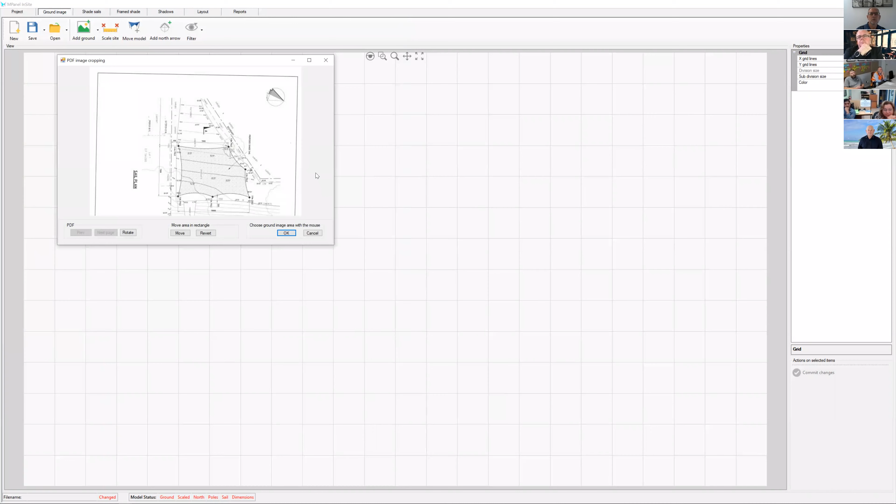Now, what we're presented with is a tool to actually import the background. And this is actually from one of our customers in Australia. So the first thing we do is rotate this to the correct orientation. Having done that, I'm just going to select this symbol here, which is the direction of north, and drag it to a place in the drawing that I'm going to be working.

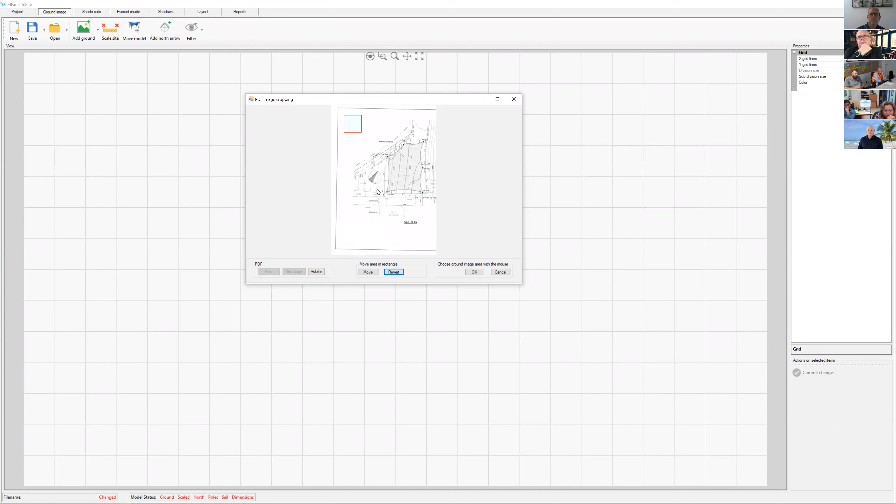Now, this could obviously be a scale as well. A lot of PDF drawings come with a scale, and we could drag that scale into the working space. Now I'm going to select the area of the drawing that I want to import and select OK.

So here is a typical PDF file that we've received. The first thing we have to do is scale the site. Now, I've actually got here in the drawing a dimension to use. I select the 2 points and enter the dimension. Now, this drawing is now scaled correctly in 3D. Everything we do now is correctly scaled.

So an important thing that we need to know from any site is we need at least one measurement. And that might be, for example, if we haven't visited the site, we can look at a road or a car park structure, we can scale a drawing by picking up some detail from a photograph.

The next thing we have to do is add a north arrow. Now, north here we can see is, we change the angle of north to 25 degrees. And you may not see some of the details here in the properties.

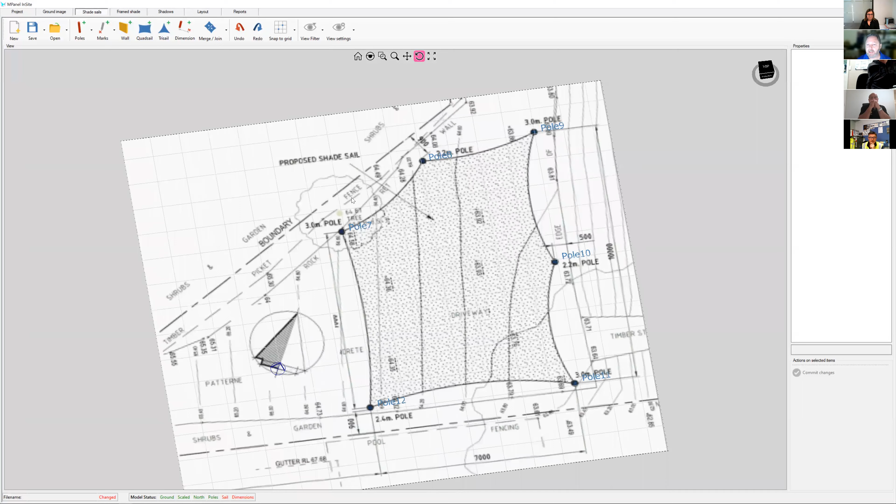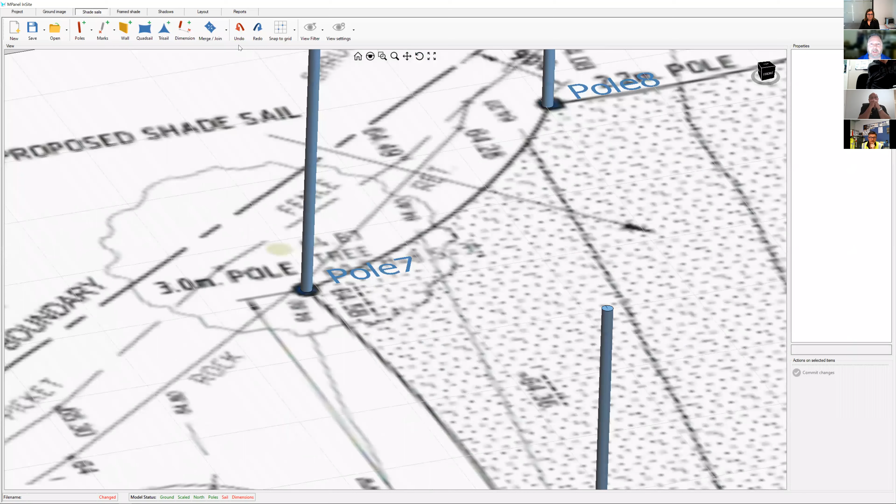Now what's happened is we've added 6 poles that are all the same height. And according to the design here, we need to make some of these poles lower in height. So I'm going to hold down the shift key and select the 3 low poles and change the heights, all of those at the same time.

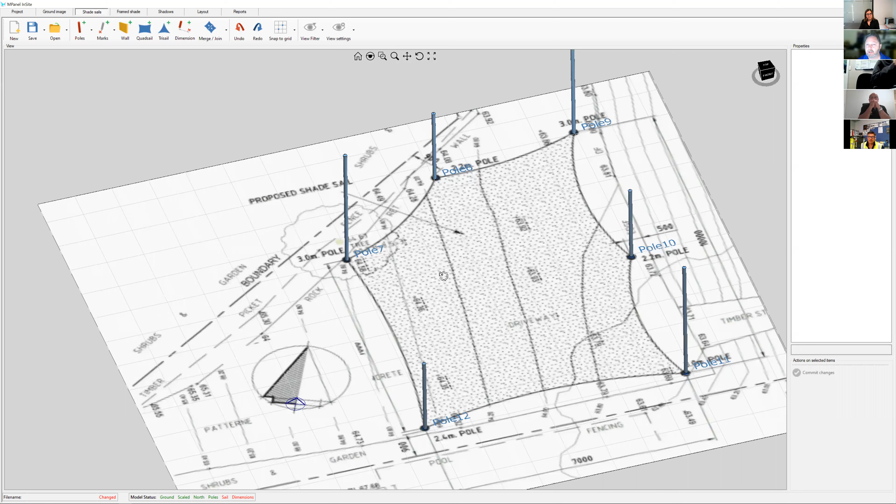The next stage is to add a sail. We start, I use top left, but it just needs to be clockwise. It's not important. There's our first sail. Add another sail.

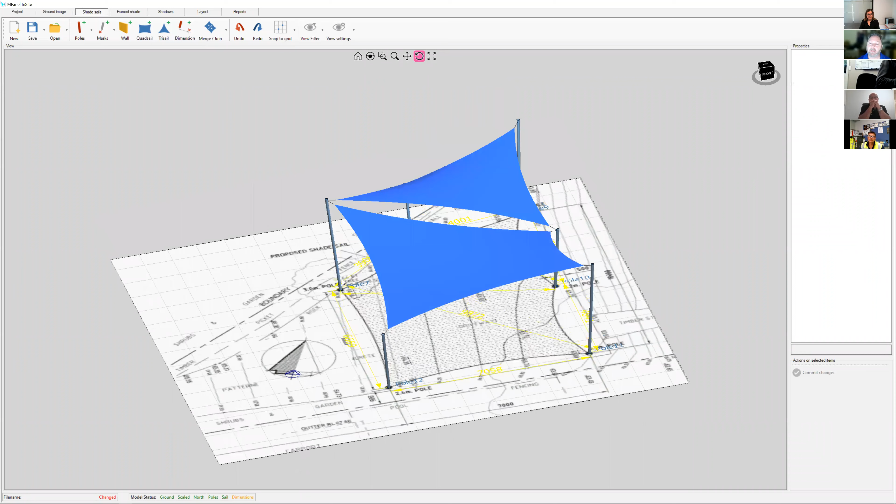Now, what you may not have noticed when I added that second sail, I'll just go to top view. I'll just undo adding the second sail. Now notice the angle of these 2 poles. As I select the last pole, watch the angle of this pole.

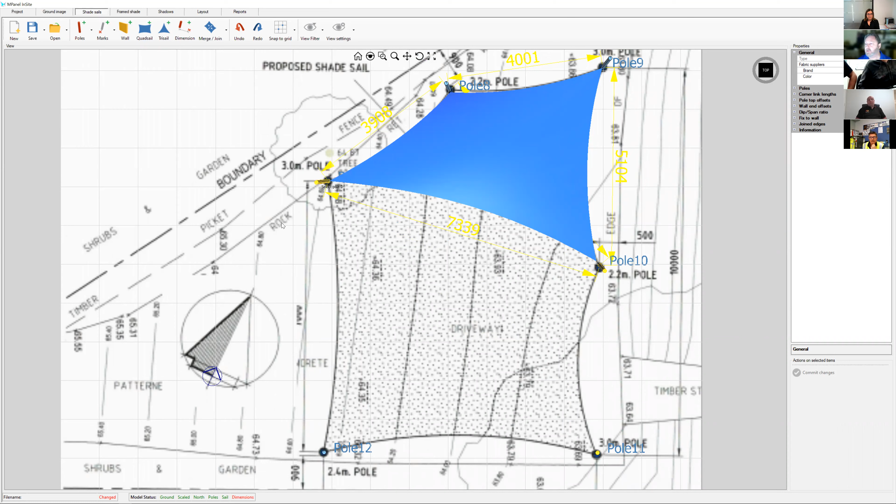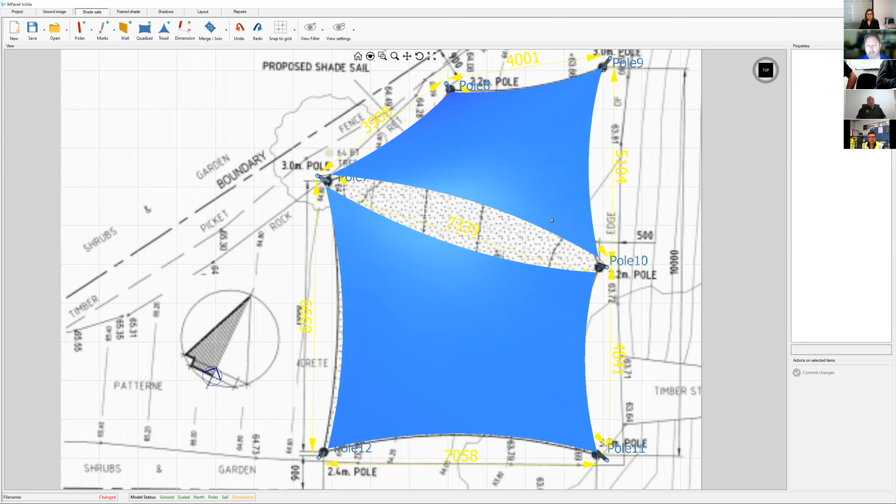So this isn't a drawing program. It's actually a very, very complicated mathematical program that is presented as a very simple user interface to design shade sails. This is a force balance shape. So as we add these sails, these poles are actually changing reaction angle to deal with the new forces of the additional sail.

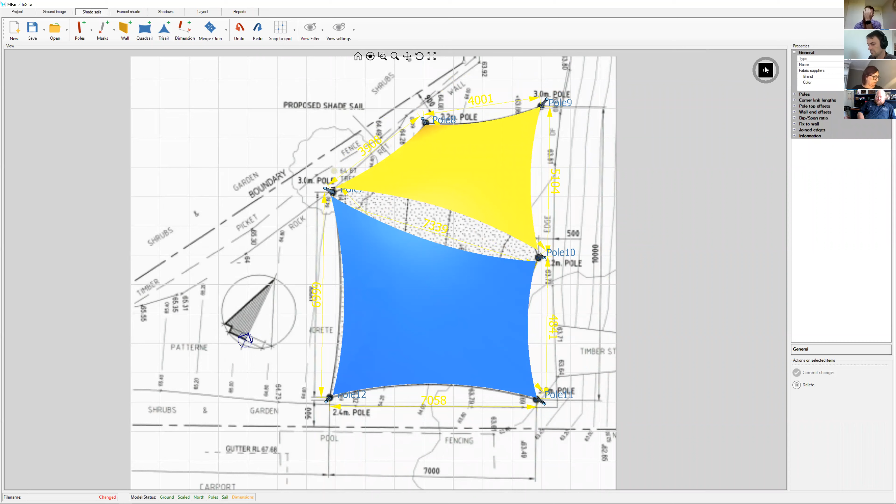Now we've got several choices. We can, for example, join these 2 sails together. So we simply merge and follow the instructions. We can undo that. We can add a middle connection. And if we go to shadow, look at the shade that we're producing.

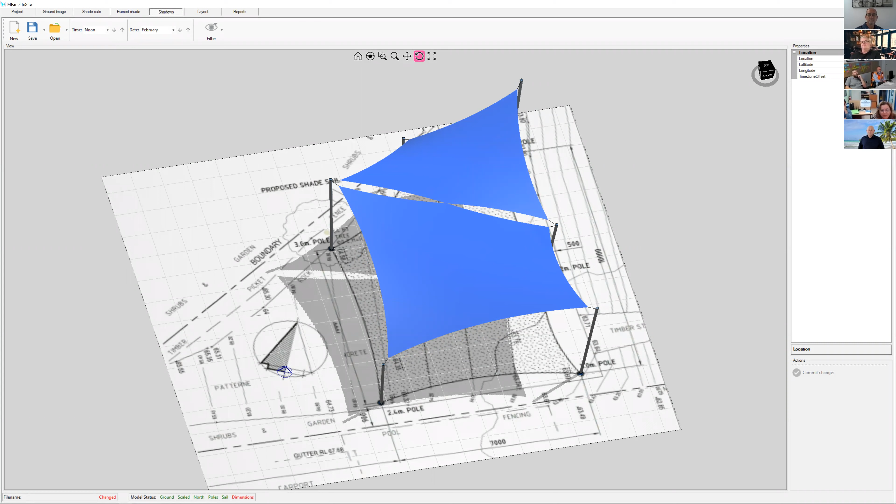And if the customer decides that at this particular month, at this particular time, we're not achieving the shadow that we want at this location, we can either add a new shade sail or alternatively go back to the design page, grab a pole and simply move the pole, relocate it. The sail reconnects itself automatically and we can go back to the shadow.

So you can imagine sitting down with the principal with your little laptop, having imported an image of a piece of play equipment and making decisions with the principal. Do you want the pole on this side of the footpath or this side of the footpath? And very, very quickly determining that you're going to get the shadow on the play equipment or you're not.

If we wanted to add another sail, simply add another pole. Let's add a triangle this time.

And we can change the heights of the sail connections. We can change the pole heights. And as we saw before, change the location of the poles. So before I move on to other designs, any questions at that stage?

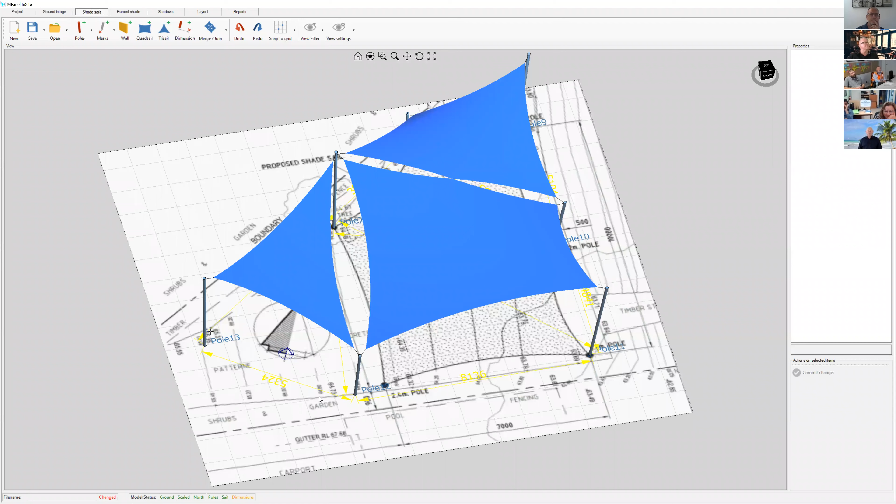Alan, I've got a couple of questions that were sent in via email, so you might be able to answer them here now, or alternatively we can hold on. Just let me know and I'll repeat them. Yep. First question was how to overlay multiple sails onto one overhead aerial photo. And the other question was, can you design a sail with more than 6 connection points, which we're looking at here, I'm thinking. Yes, yeah, exactly.

So as we saw before, we can join these sails together. So I can merge these sails and then merge these sails. Oops. Pardon me. I've obviously done something wrong, but we do have the ability. You can see here we've got a 6-sided sail. I know that I can merge a triangle to this. So effectively, within reason, we can produce any number of sail connections.

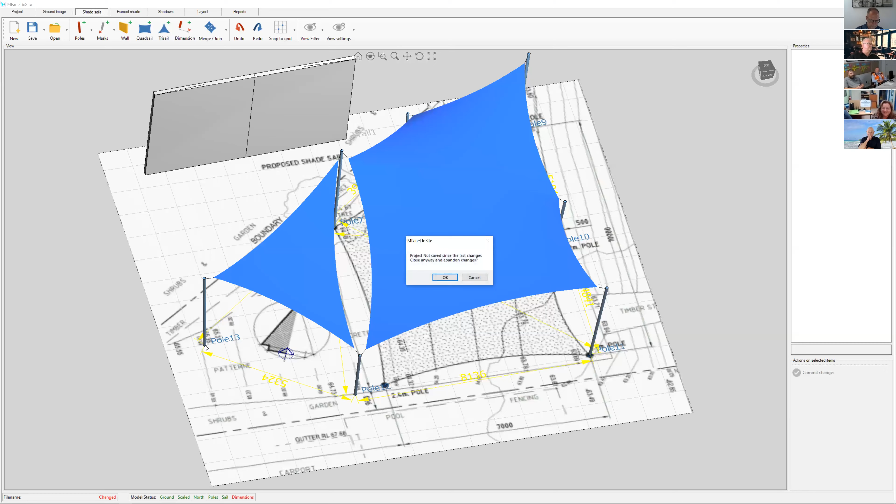We can also produce fixed edge connections. So we could add a wall, for example, and from that wall, we can add a sail and connect it to. Okay, might have to restart the program. I think I must have done something wrong with it. Apologies, I'm working with a beta version of the software. We're always testing new features, so bear with me a second. I mentioned that was the splash screen for the program.

The question that you asked before, Alan, on how long does it take to create the design, we asked people to send us their suggestions. So I got 30 to 45 minutes approximately, and someone else said 30 minutes. So how long would it actually take to put that together? Well, let's actually go to that design. Excuse me, I've got a frog in my throat.

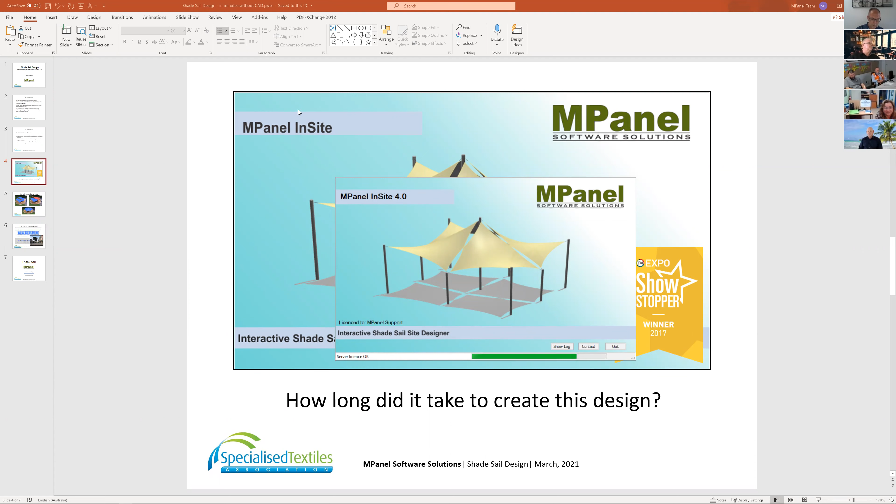So to save a bit of time, I created a blank sheet. So we started with a blank sheet, and rather than you watching me count the number of squares, which I'm very slow at when it gets more than 10 fingers, I've pre-added the poles. So the other thing that I've done to this design is, let's go to the shade sails, I've changed the heights of the poles.

Now to show you the procedure, all of these poles were added at the same time. And I simply, again, hit the Shift key, select these 4 outer poles and change the height to 4 meters on those 4 poles, all at one time. The same with these poles, selected all of those at the same time and change the heights. And one pole that's got a different diameter, so I'll change all of the diameters at the same time. And this pole is at 6 meters. The other distinguishing factor, this particular pole has a specified lean angle of 0 degrees. So that took me maybe 2 minutes.

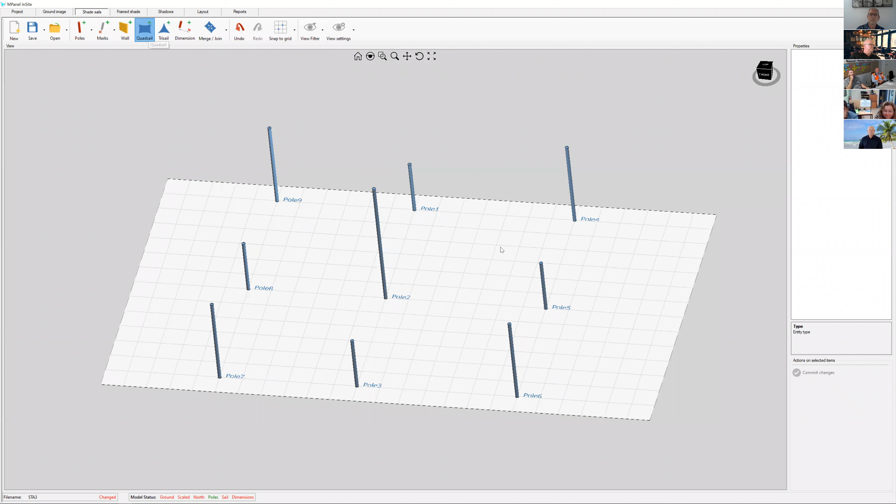So let's now add the sails. And again, watch the angle of the poles as I add the sails. Sorry, Alan, while you're doing that, can I ask you a question as well? Sure, yeah. There's a couple now. I'm just trying to go back up and find them. Somebody's testing if he can walk and chew gum at the same time, right?

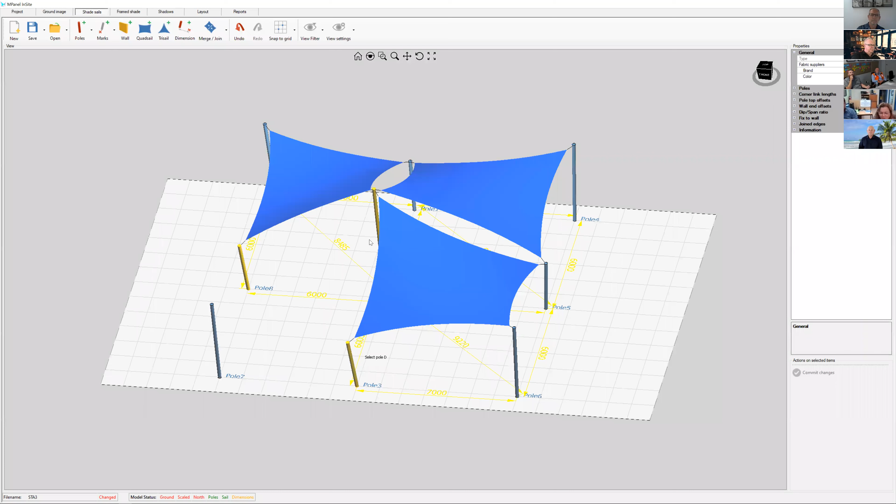So watch the angle of this pole. It straightens up. So there's our basic design. And then we're simply adding mid connections to each of the sails and working our way around. So literally you could do a design like this in under 5 minutes. I think I've done it in under 4 minutes at a trade show.

And if we want to now make changes to the fabric, you can see this is currently Gale Commercial 95. You may not be able to see this detail. Most of the fabric databases are included with the software, and as we get new fabrics, we add them. So if we wanted to make two of the sails a different color, for example, oops, I forgot to actually make that change. So I'll make both of them yellow at the same time. Again, I hit the Shift key, commit changes, and now we've got different colored sails.

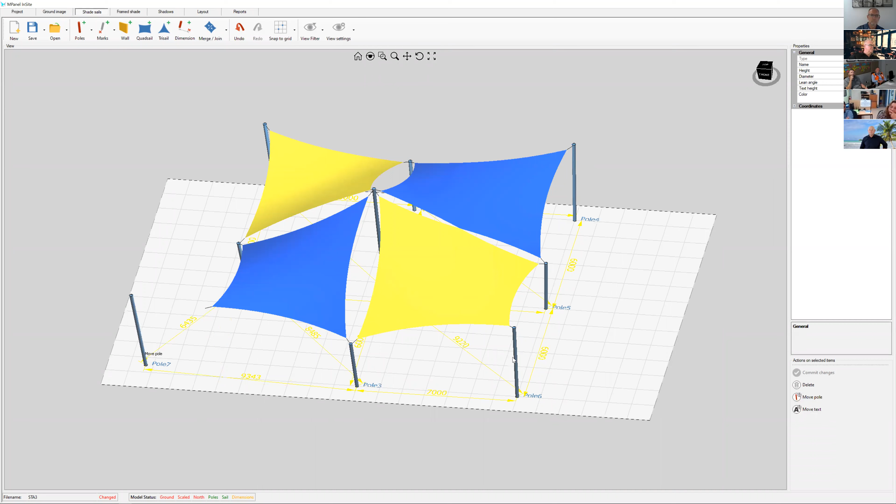And as we did before, this program mathematically is capable of dealing with a fairly complicated model. Grab a pole and move it, and the sail moves with it. So it does give you the opportunity, if you had a background image here with play equipment, to very, very quickly show the principle. Here's the shadows in November, December, and are we getting the right coverage? Move the poles around, change the heights of the poles to achieve the desired results.

Any other questions on that? I've got a few questions that have come through, Alan. Yep. What if we want multiple connections at different heights on the same post?

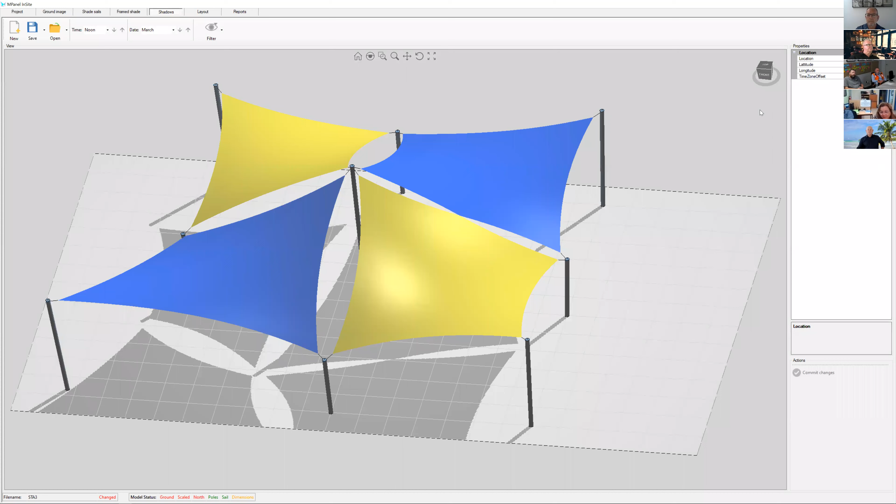Okay. I'm going to take this pole here as an example. So you need to go back to the design page. I'm going to change this from a 2.5 meter to a 5 meter pole. And then selecting this sail, which I entered A, B, C, D, following the same work with each sail.

I now select the pole top offset for corner C and change it to 2050. And we can see that pole. We've now got 2 connections on that one pole at different heights. Any others?

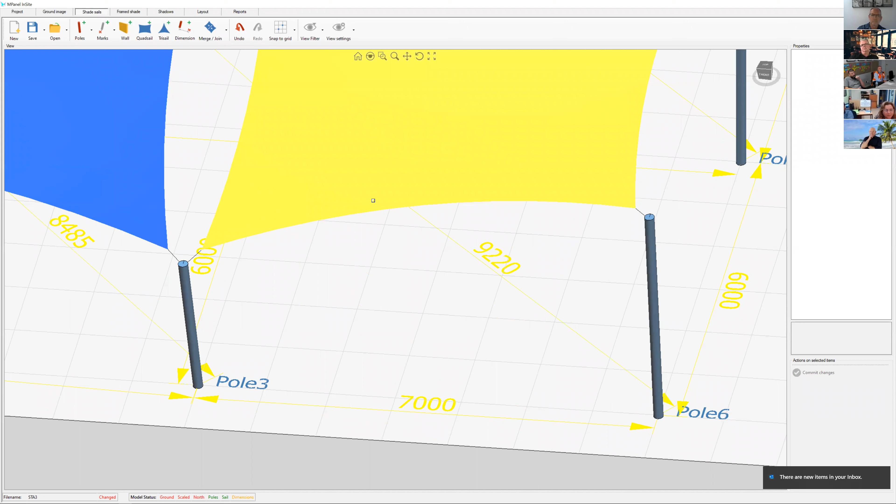Yes. Are the yellow markings underneath the post center measurements? Yes. Yeah, and that's something that's set up by default in the program. So at the very beginning of the program here under settings, we have defaults established for the program. So the basic grid, for example, in my case, I use a 24 by 14 meter grid.

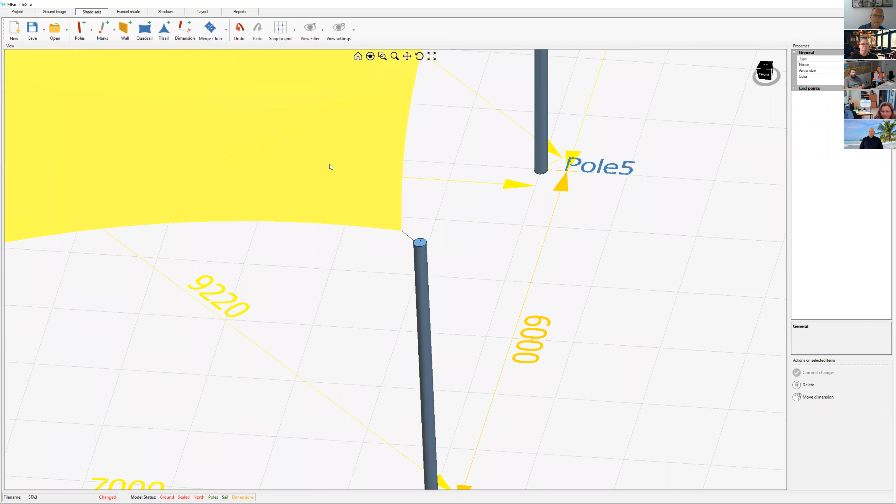The dimensions are yellow. Now, if I don't want a yellow, it's good with a color like a photograph background to have something that's contrasty. Obviously, when we're dealing with a clean sheet of paper, the yellow is not very easy to see, but you can zoom in and you can see here, these are 6 meter by 6 meter, actually 7 meter, and the diagonal. So I can change those individually,

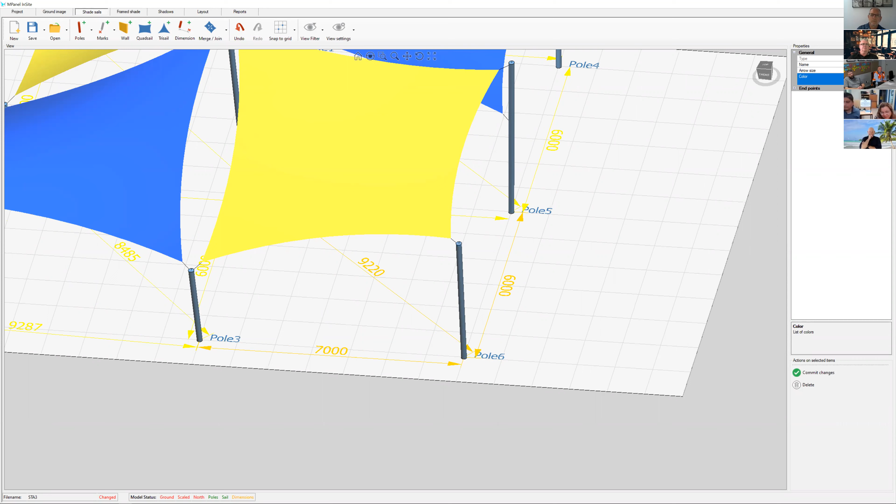or obviously change them as a default, and then every time I add a sail, it automatically adds dimensions. Now, for the purposes of presentation to the customer, you might choose to leave those dimensions on. We can turn the grid off. We can turn the dimensions off. We've got filters to turn anything on or off in the program.

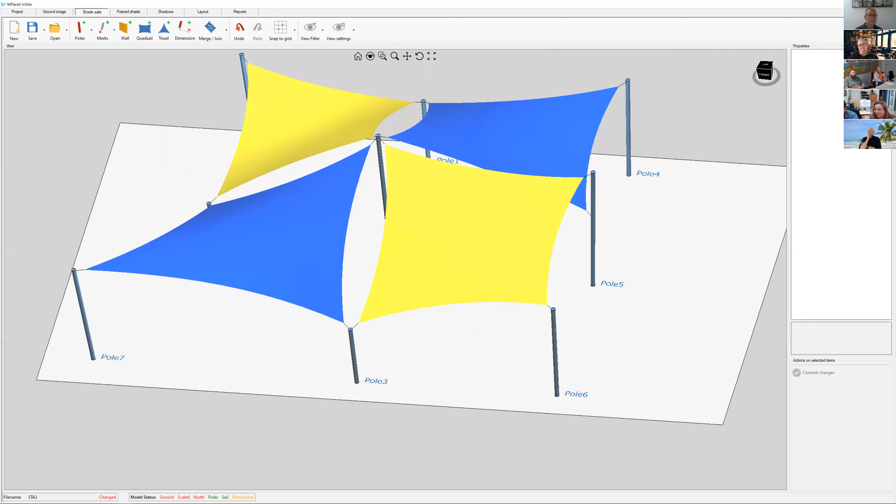Okay. Can I run one more question past you? Sure, Anna, yeah, keep going. How do you populate the fabric specifications into the software for calculations of elongation? Is that Andrew that asked that question? Do I have to say? I saw Andrew was there. You'd have to have an engineering question.

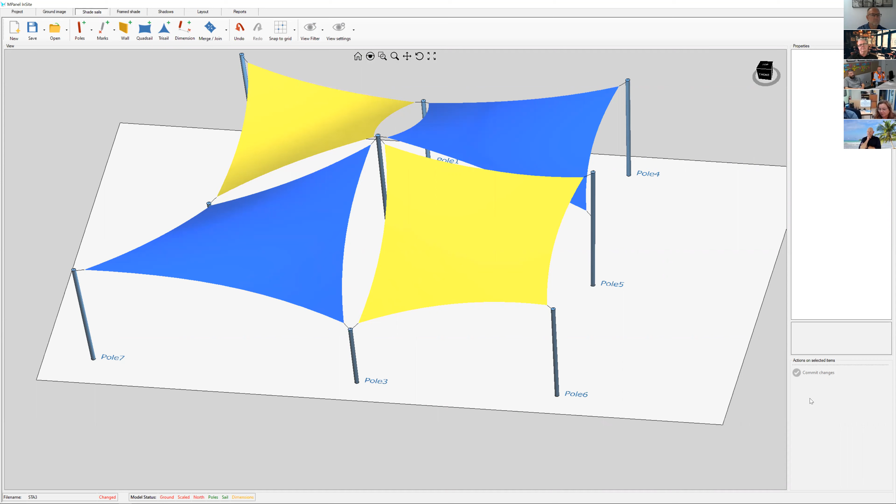This program is not dealing with the actual fabrics. So it's assuming, in other words, it's unitless. So all of the fabric is being dealt with as a grid, and the force balances are being calculated on a unitless basis. So it's effectively the soap film analysis that's being used. Okay.

And one more question. Is there any way to see if water ponding can happen in this design, especially for PVC membrane? Unfortunately not. This is a design program only, so it's for visualization purposes. It does not deal with ponding. So we have other programs that are more technical that will deal with that.

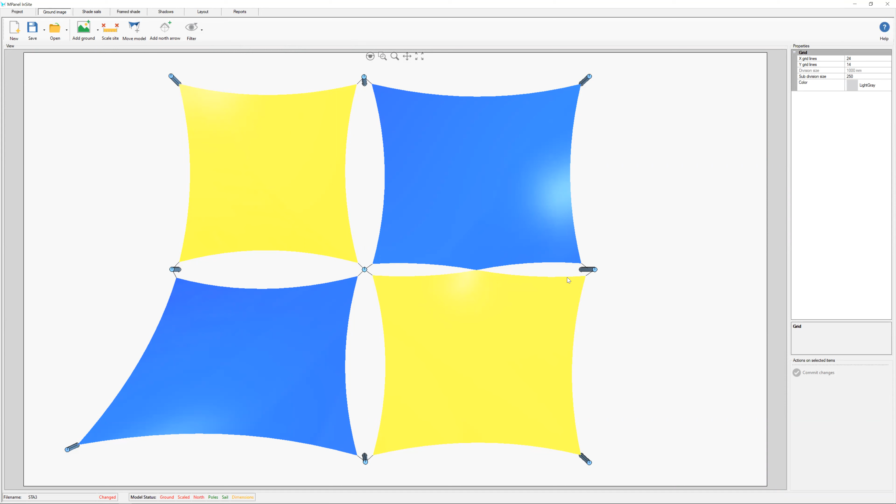But yeah, this tool is primarily designed for the front of office. The purpose is to help actually get orders, to get designs. So it is for producing designs for your quotations, working with the principal so that you're actually designing a solution that is the principal's solution. He's not going to be buying from anybody else. He's going to be buying his own design from you. It's the software that you use to actually get the purchase order in the first place.

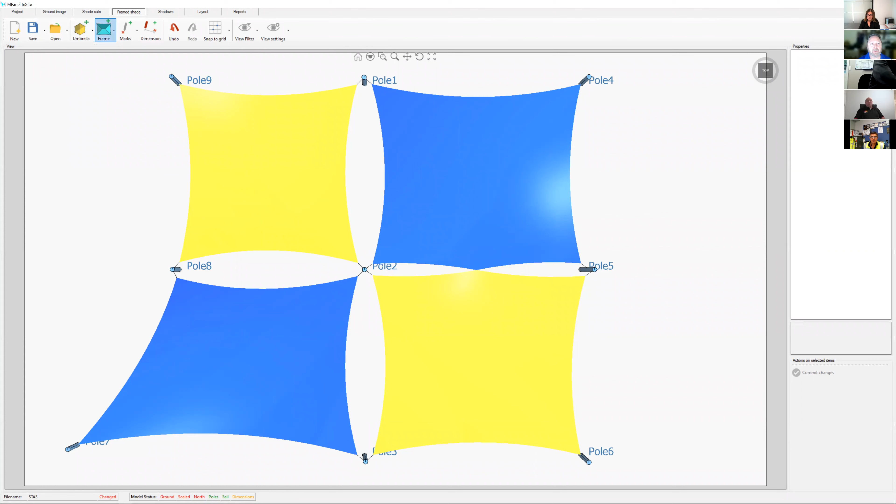Let me just quickly walk through the other things that the program will do, and then we can come back to questions. So we looked at the ground image as being a PDF. We can also bring in an image or a DXF, and rather than actually go through those, I'll simply show you a couple of examples of those once we've finished. We can also add frame shade structures.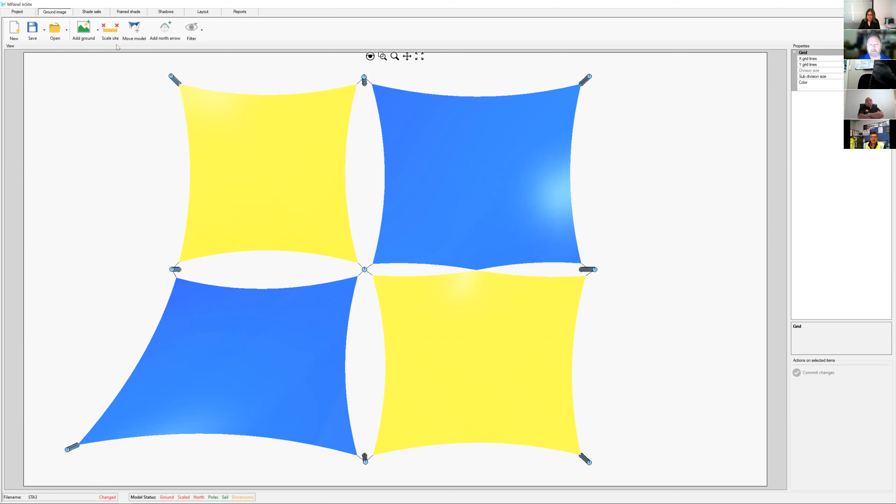So we now have the ability to add umbrellas, either square or hexagonal, or sorry, radial or polygon based. The same with a standard frame shade structure. So a simple rectangular frame shade structure or a polygonal frame shade structure. Now you can see here, this is all completely parametric.

So if I want to make this 6-sided hexagonal instead and change the device from a 3-meter diameter to 6-meter diameter, and move it into a location, I can rotate the thing around, change the color of the fabric, change the poles, change the pole heights, change the basic shape of the frame shade structure. And the same applies to a conic. So the umbrella is exactly the same.

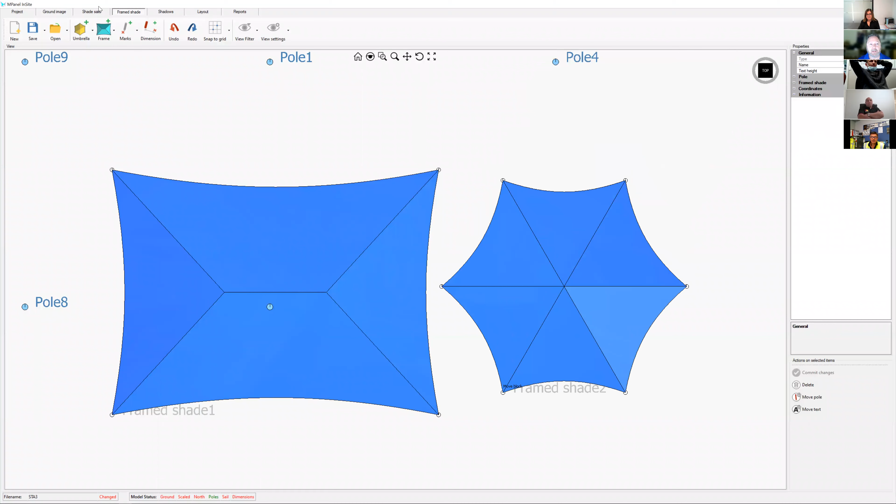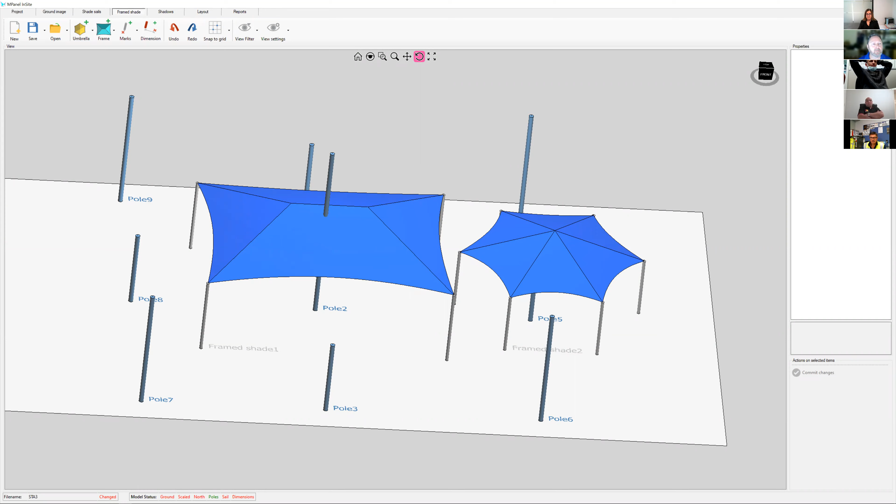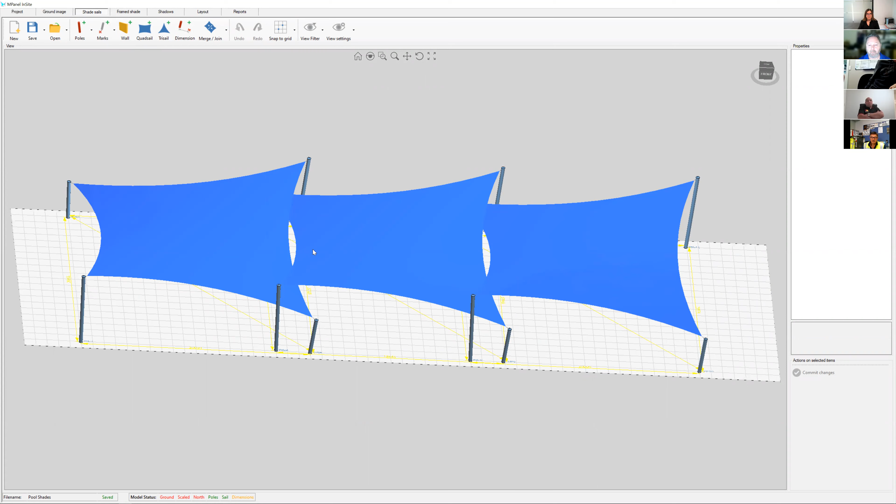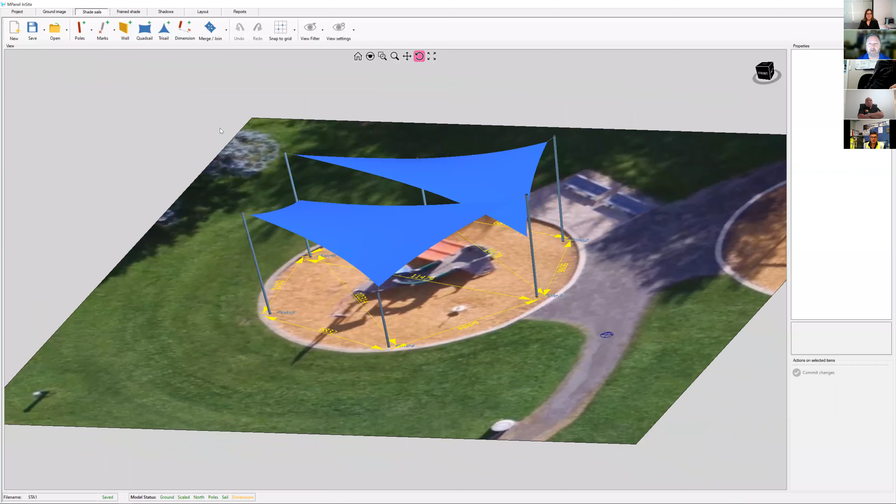Obviously, with an umbrella, the poles, instead of being in the corners, will be in the center. Let me just open up a design. So here we've got a design that is on an image background. Typically we would turn off the grid, and we've got mixed height poles, sails with mixed connections. We can turn off the dimension information, and obviously you would be able to add a mid connection, change the colors of the sails.

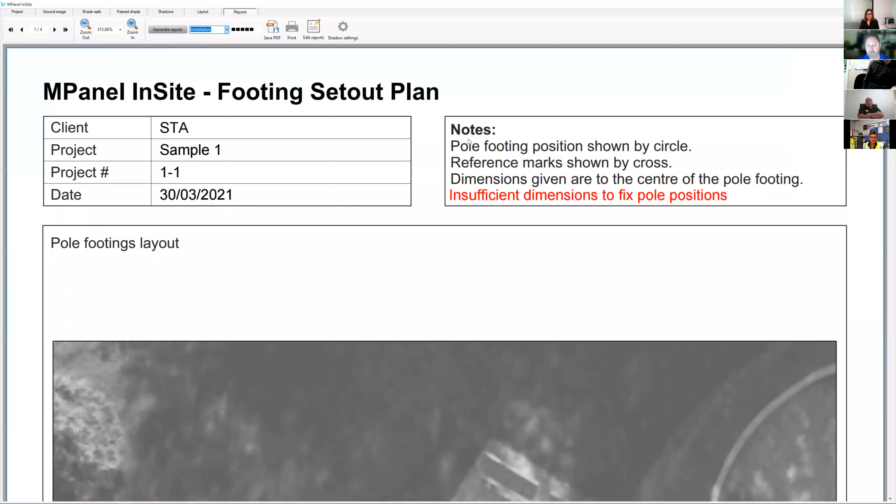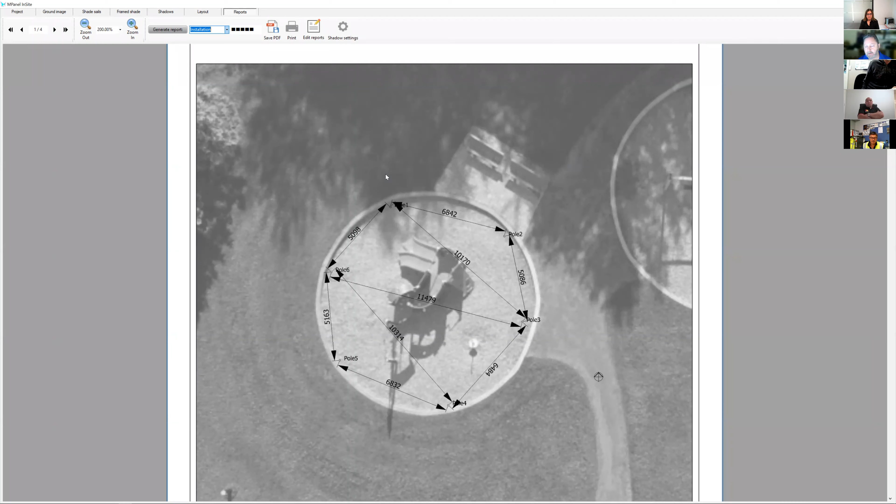The other important results from the program are the ability to produce reports. I'm going to produce an installation report. Just zoom out so you can see it. So here is the pole set out information. Typically, back in the design stage, we would add a couple of additional points, and from those points, we'd add a couple more dimensions. So from reference points, for example, from here to the poles, you'd have reference information for the installers.

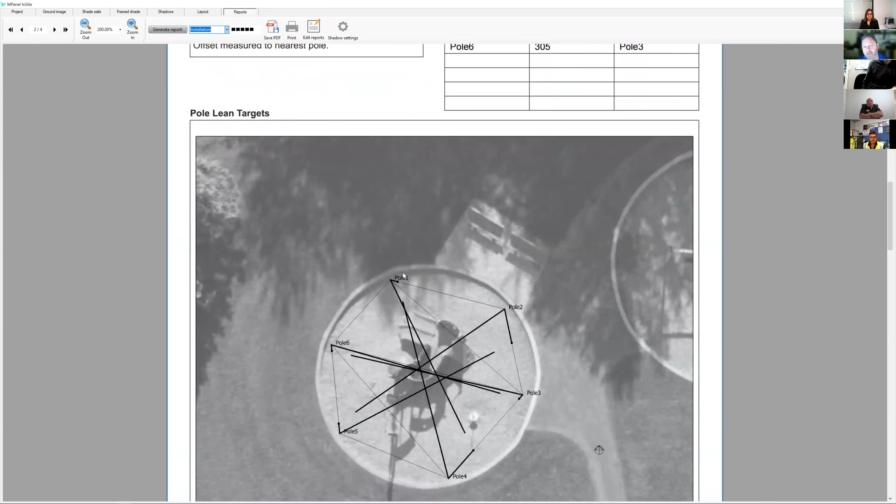And the other thing that's important is we're actually providing the correct pole lean angle. So you can see here, pole 5 is actually leaning at 2 meters away from pole 2. So from a line between pole 2 and 3, you can see we would actually lean pole 5 backwards, pointing at that location.

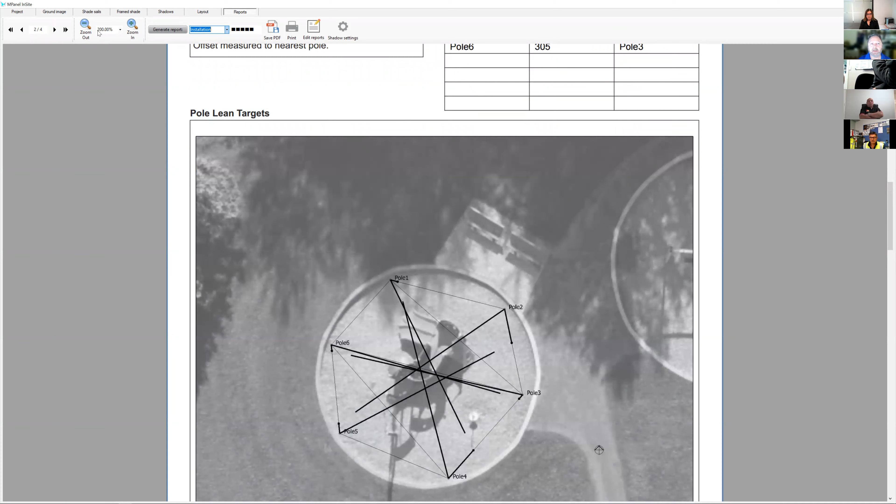We also have visualization reports, which would go to the customer, which include the display of the design itself and a shadow analysis. And we can produce multiple shadow analyses for different months or times of the year. And a simple layout, isometric top, right, and front view.

I've just realized I'm taking a lot more time than I should have, Anna. That's quite all right, Alan. Not a problem. I think it would be very hard to explain this in a few short minutes. And I'm sure that everyone's okay to hang around for another 5 or 10 if needed.

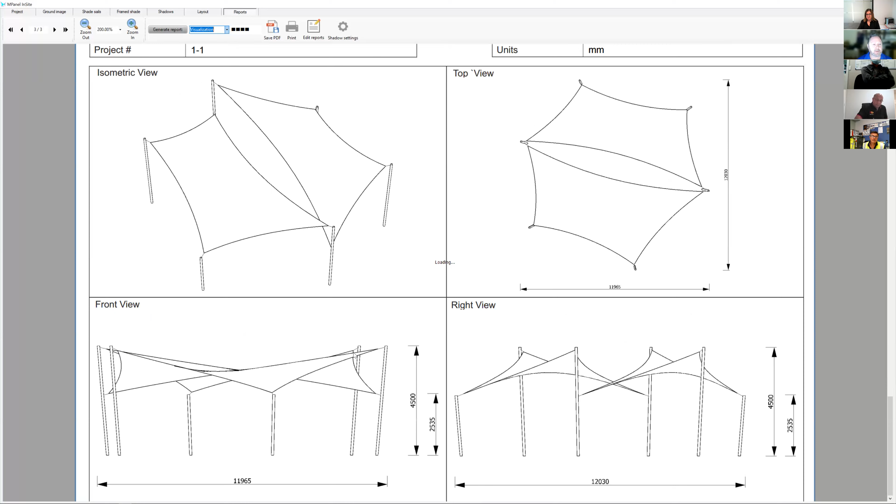Well, on the presentation here, you can see that same design we looked at before. And the idea of presenting to a customer multiple design options: even drawing these sorts of designs by hand in a simple plan view, which I know a lot of people in the industry still do for the purposes of quotations, is still a time-consuming task. So if you're generating lots of quotations and providing drawings for the client, providing 3 different design options, which in InSite took me 5 minutes, would take a considerable investment of time.

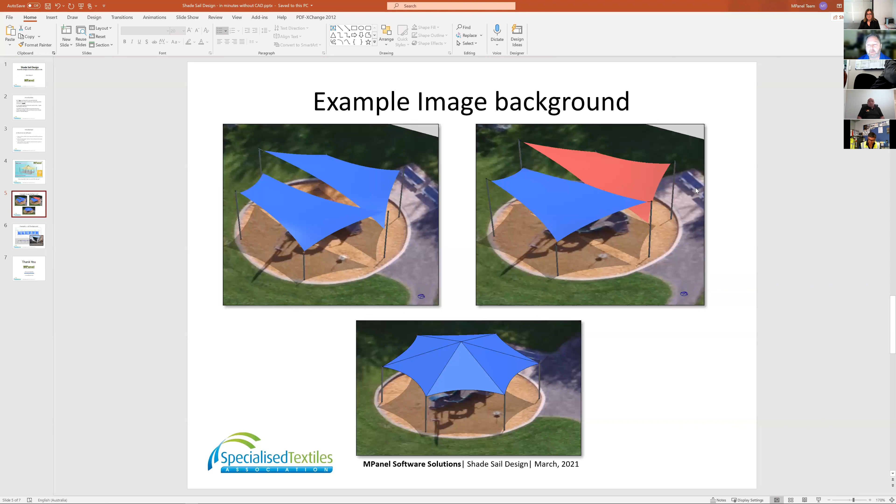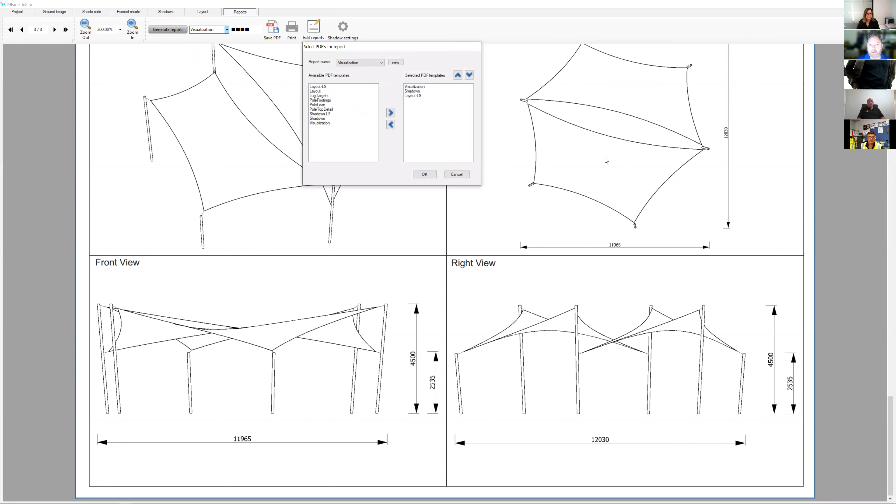Option reports. Okay, I'm not seeing an option report. There is an edit reports. Perhaps that might be what they're saying. This program allows us to not only... we send it out as standard with a whole heap of template pages, so we can actually generate our own reports. So here's all of the available PDF templates. We've got a layout in landscape view, standard layout, pole footings, pole lean, pole top details. So there's actually a fabrication detail for the poles as well.

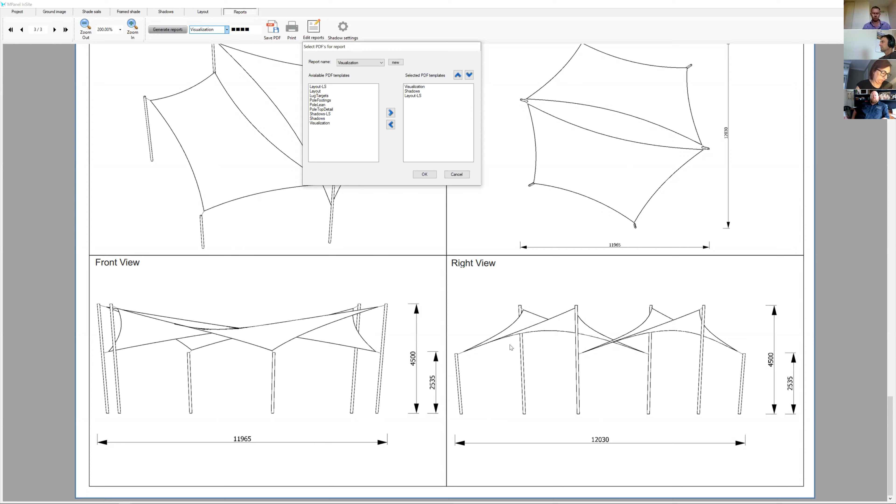If we go back to the sail pole report, here we can see pole number 3 has 2 lugs attached to it. One is 50 millimeters from the top, the other one is 2050 from the top, and 39 degrees or 40 degrees rotation. So this could be sent to the fabrication department for them to make the poles. Hopefully that answers that question, Anna. I'm not quite sure what the option report was.

That's okay. If there's more to that question, then perhaps the person who asked it can email me in a few moments. Absolutely. The next question was, can we please have a demonstration of more than one connection along the span of 2 sails? Along the span of 2 sails. We can't do that. Sorry, it's only one connection between two sails.

Okay. Thank you. And looks like the last question. Can you introduce overhead steel to prop up sails? I got that email recently from somebody, so I suspect that's the same person. We are working on new designs constantly. So every year we make changes to the software and release improvements as well as updates. We have to keep the software maintained to deal with Microsoft making changes and other DLL changes that happen, to make sure that we're compatible with those.

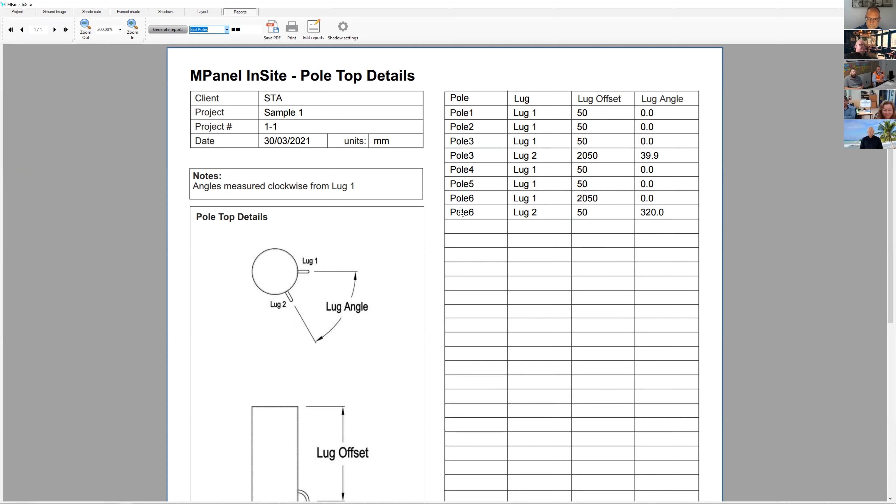At the moment, we have the ability to make shade sails and frame shade structures and umbrellas. We intend in the future to add other frame structures. We're also exploring in the next development cycle to actually be able to import a DXF model that the user can then parametrically make changes to. So each year we'll add more and more features and more and more structures. We have plans already for things like barrel arch structures and car park structures. So I'm sure we'll get to that person's design eventually. That person says fabulous. I'm pleased to hear it.

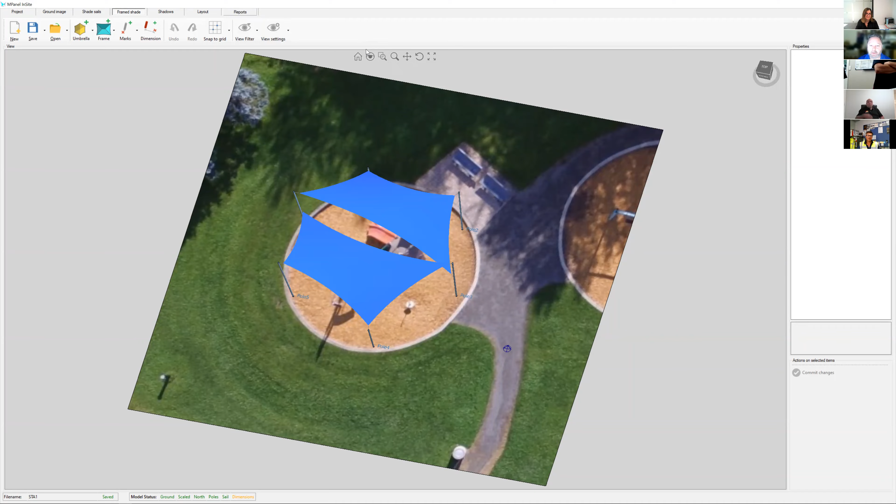And the sail area, which is often misquoted: people will often quote their design as a distance between the poles at 10 by 10, and therefore it's a 100 square meter shade sail, where in fact the actual shaded area is substantially less. So we give you both. That's the distance between the poles, and that's the actual shaded area. And you do have control over the catenary dip span curve depth, so you do get some control over what that ratio is.